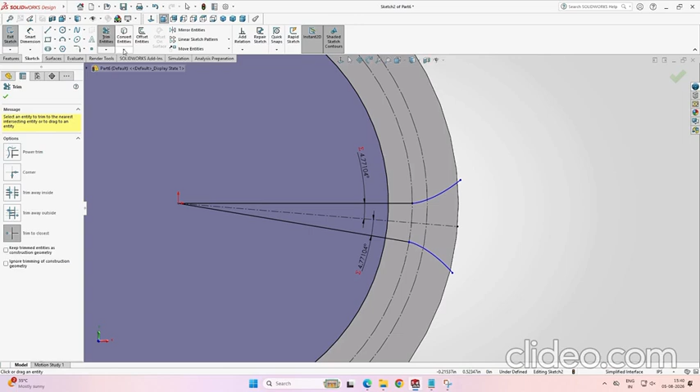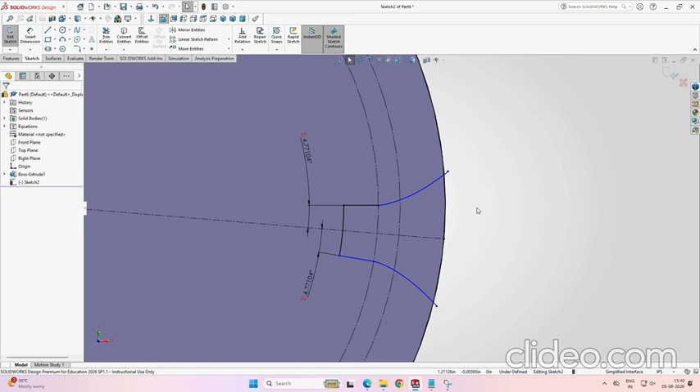So after adding this, what we'll do is we'll trim the circle, that is the dedendum circle, right? We'll keep only this portion and the solid lines also, and we need to close this particular contour to cut it through the blank. So I made a circle and I made it exactly coradial to the outer diameter of the blank, and then I'm trimming the extra sides, the extra edges, and we get the final area which will cut through.

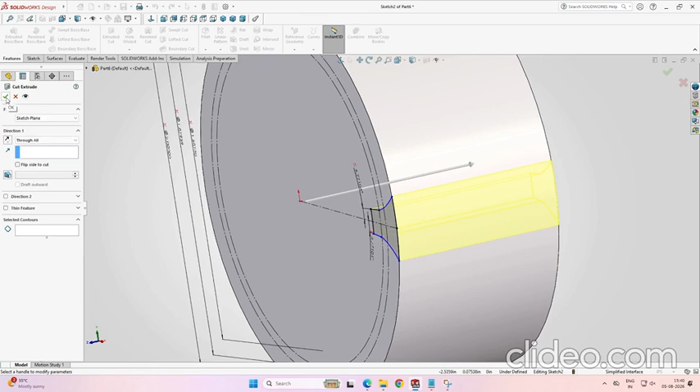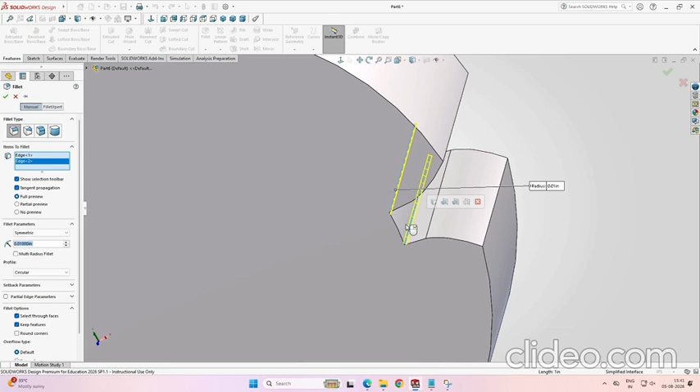So I went to extrude cut. I'll do a through all cut and I'll click OK. So we get this cut portion with two involutes on two sides. We'll add fillet to the roots of the gear teeth. So I set this to 0.01 inch and select this edge and this edge. Click OK.

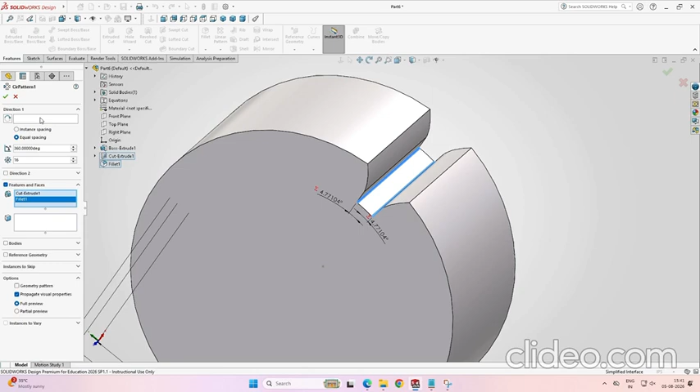And now we are going to pattern in a circular manner this cut extrude one and the fillet. So what feature you want to select? These are the features. From here you can select, or from the drop down there, I'll select cut extrude and fillet. These two are selected. And the direction, I have selected this face, or any circular edge you can select. You can see the preview, right? You can turn on full preview, click OK, and you get this gear model.

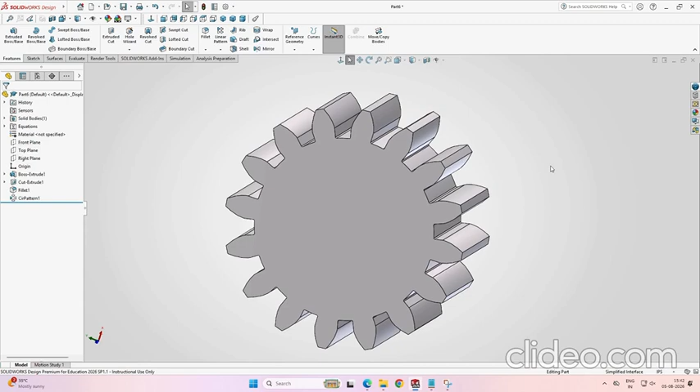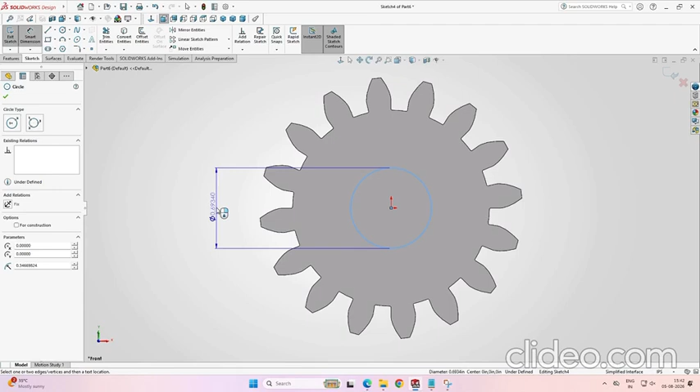Finally, we'll add a shaft to this gear. So what we can do is we can draw a circle. So okay, I selected this face. Instead of selecting this face, I'll draw the circle at the mid plane, which is the front plane. So I'll select front plane and start a sketch. Let me give the diameter of the shaft as 0.75 inches.

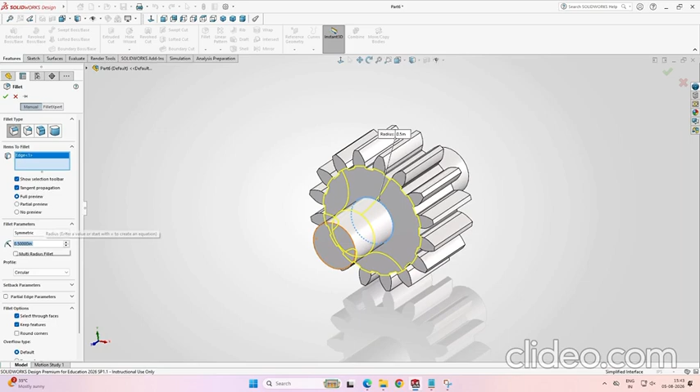And then I'll go to features, extruded boss. The direction is mid plane, and the extrusion length, I'm giving it as 3 inches. All right. Click OK. So you get a shaft. So this is also called as gear shaft. And then I'll add a fillet to these edges. So set this as 0.5 inch on this side and on the other side as well. Click OK, and you're done with the gear model.

So to enable RealView graphics, if it is not enabled, go to toolbars and click on view. If you click on view, you can see on the top there will be a computer symbol. You can turn on enable RealView graphics.

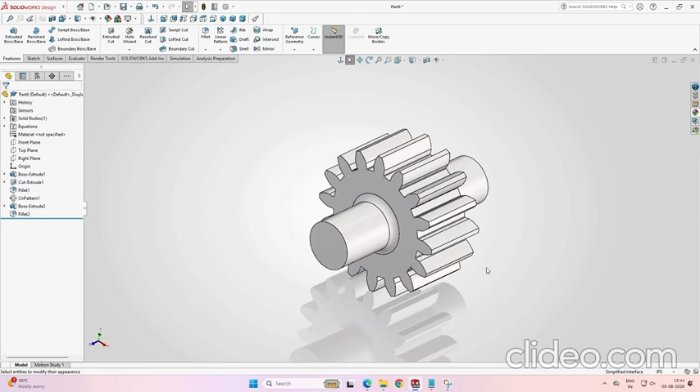We can also add appearance to this. So we can go to appearance from here. I'll select steel. Under metal, we have steel, and I selected polished steel here. So you can double click on polished steel. So the whole